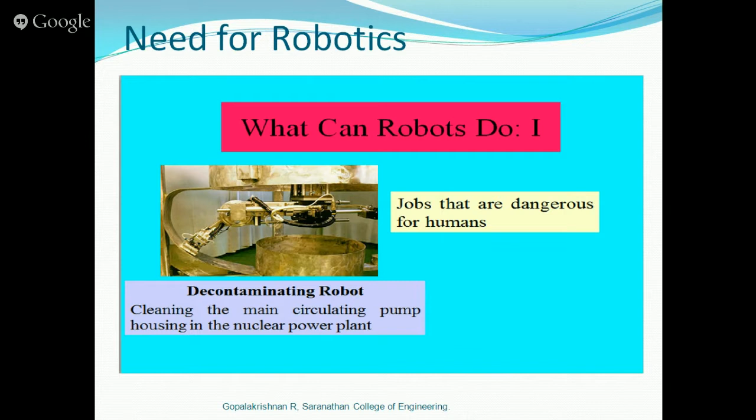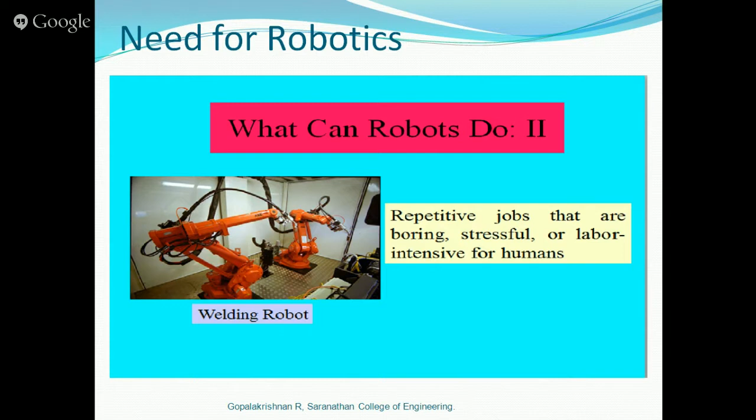Thirdly, in this technology and development situation, we are going in for use of robots in several areas. Like in metros, robots are used in cleaning of underground drainages, tunnels, etc., where it will be very difficult for incorporating humans in those type of actions.

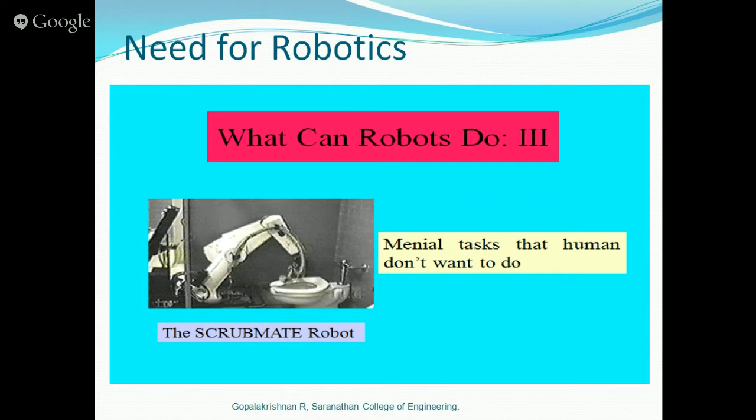Coming to the applications of robotics, there are several areas and there is not going to be a single area where robots cannot be used. Like in general purpose robots, we have industrial type of robots, educational robots, military robots, healthcare, research robots, and entertainment robots. Coming to the example of industrial robots, we are using robots for welding, spraying, painting, pick and place.

Coming into educational robots, we are using computers. Computer is a type of robot, and we have projectors. These are robots which actually reduce human effort.

Military robots. In military areas, we are going in for use of robots for actions which may endanger humans, like surveillance, etc. In healthcare, we are using robots for diagnosis, CT scans, endoscopy, etc. These are robots which will actually come in handy for those type of operations.

And we also do have entertainment robots. In these days, we have created a humanoid robot which actually plays a song, which will be able to give us certain application, which will be able to give us a situation where we feel homely.

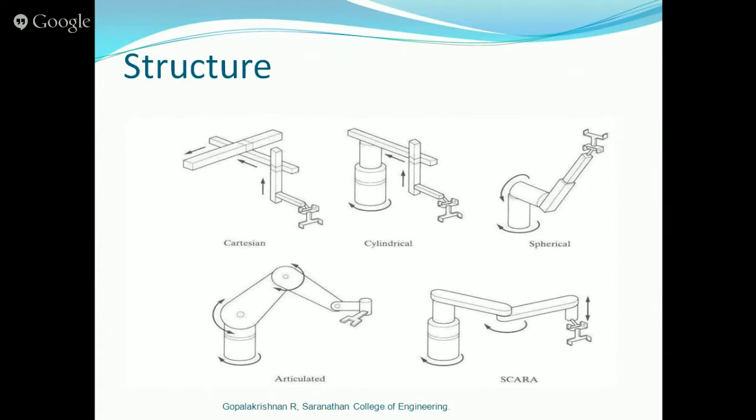Actuators and manipulators play a vital role in control and motion of a robot. As we say in a human arm, manipulator is a human arm. Actually, actuator imitates the actions of nerves and bones. So a manipulator is a whole arm which controls the action of any given system, whereas the actuator plays the role of incorporating the actions of manipulators.

There are different types of actuators which we use in these areas like pneumatic, hydraulic, mechanical, and electrical. In pneumatic type of actuators, we use an air control mechanism, whereas in hydraulic, we use a liquid control mechanism. In mechanical, a piston will be actually doing the role of controlling the motion of any manipulators. And in electrical, we do have several different types of motors, DC motors.

Specifically, we are going in for DC motor because we'll be able to control the path with DC rather than going in for AC. In DC, we will be able to get a precise action and precise movement, whereas in AC, we won't have any controllers. So in DC, it will be easy for us to go in for control.

Drivers, since we use DC motors specifically for robots, we are going in for drivers. Drivers are generally used to switch over AC to DC mechanism. There are different types of drivers we use for these types of robots, as electronic switches play a main part in these types of drivers.

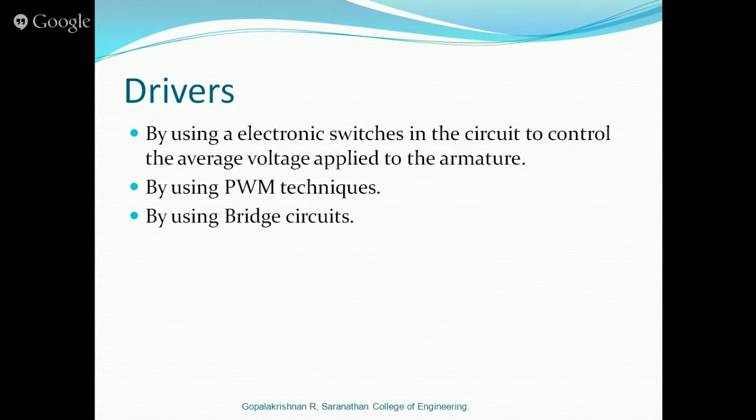Coming into control systems of robotics, there are two different types of control system: non-servo system and servo system. A non-servo system is a system where when we give an input to any system, the output will come without any change or interference, where errors won't be corrected.

Whereas in a servo system, we'll be having a feedback where the mechanism will be able to rectify the errors in the system. From the feedback, we'll give it into an input system where we have controllers, different types of controllers which control the errors. Controllers consist of components like integrators and differentiators. With integrators, we call it a PI system, proportional integrators. With differentiators, we call it a PD system, proportional differentiators. These types of systems give us error correction and a mechanism.

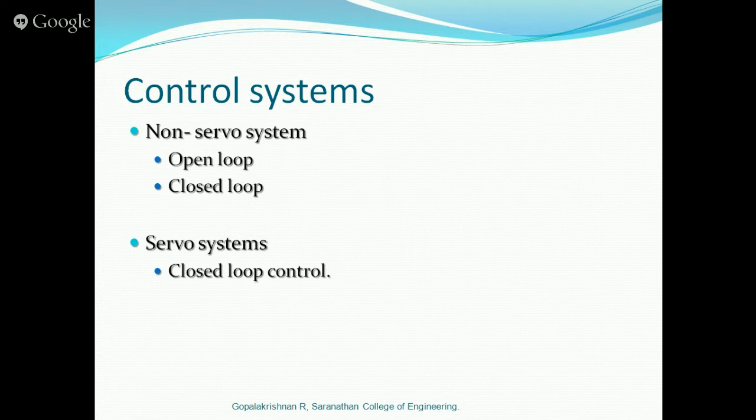Sensors play a main role in any intelligent type of robot. There are two different types of sensors: contact sensors and non-contact sensors. A contact sensor actually comes in contact with any object near the robot, whereas non-contact sensors, called non-tactile sensors, do not come into contact with any object or interference with the robot. We choose sensors basically based on the characteristics and application of our robotic purpose, like cost, size, weight, type of output, interfacing, etc.

Coming into non-tactile sensors, there are different types like proximity and range sensors used for the purpose. Proximity sensors are used for low-level distance applications, whereas range sensors are used for larger distance applications. There are different types of proximity sensors like inductive sensors, Hall effect sensors, capacitive sensors, ultrasonic sensors, optical sensors, and eddy current sensors, which are used for this purpose.

In range sensors, we have a light sensor which is based on light, and an ultrasonic sensor which is based on sound. In inductive type sensors, we use it precisely for metal type objects to be understood by a robot.

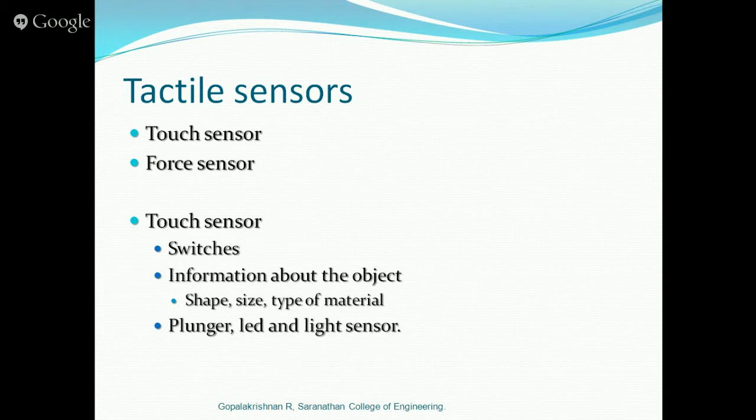Coming into machine vision: in the past, human eyes did what no machine could do - locating and positioning work, tracking the flow of parts, and inspecting output quality and consistency. Today, the requirements of many manufacturing processes have surpassed the limit of human eyesight. Machine vision provides the manufacturing equipment with the gift of sight.

Whereas the human eye is limited to what a human being could observe, machine vision gives us an absolute tolerance - we are able to observe and analyze parts of any area that could be analyzed.

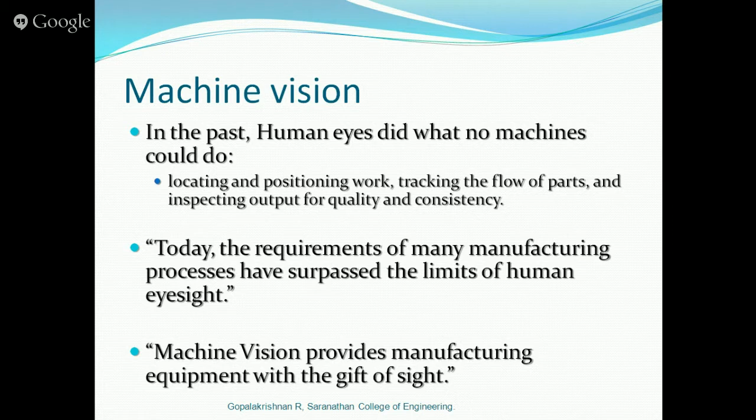Difference between human versus robot: robot advantages are strength, accuracy, speed. It does not tire, it can be used for repetitive tasks, and it can also measure and give us absolute measurement. Whereas human advantages are intelligence, flexibility, adaptability, skills, and the ability to learn and estimate.

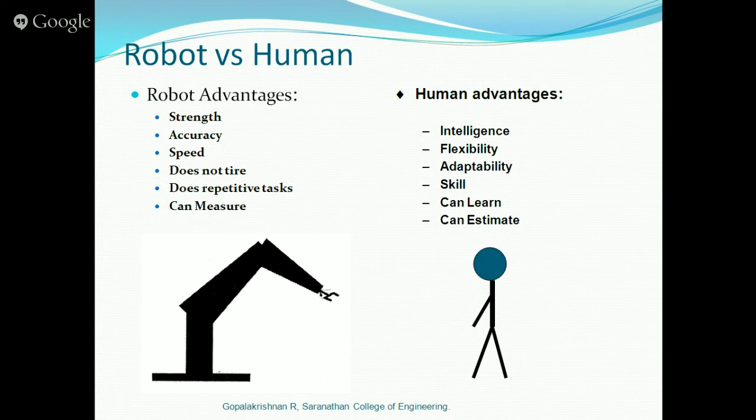Coming to robotic vision - robotic vision may be used for the process of extracting, characterizing, and interpreting information from a three-dimensional world, what we call 3D imaging. We will also be able to analyze the image, what type of image it is, coming to any industrial oriented application.

A robot in an industry will be able to acquire an image from the given task, analyze the product, give us the estimated error, and also correct the error.

What are the fundamental tasks involved in robotic vision? First is image transformation - transformation of an analog image to a digital field. We also use grayscaling in these types of image transformation.

Coming to the analyzing part, the robot will be able to analyze whether the image is in a proper condition or the particular object is in a proper formation, and it also understands the product which is to be analyzed.

Generally, in any robotic vision, we have object verification, tracking, fast extraction of stable image features, object model acquisition, efficient indexing of a model database. These are the primary tasks which will be incorporated in any type of robot in a vision system.

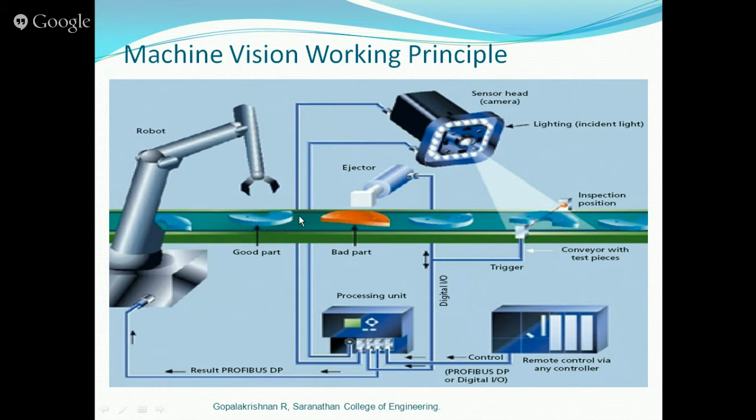We have different types of end effectors like grippers, holders, sprayers, cutters, welders. The end effector is the part which makes the whole system run, performing the process of ejecting or continuing the process. Here, the object is taken into the medium, and the effector picks or rejects the actual part of the system.

These are the components which are used in a machine: lighting, camera, part sensors, imaging, processing, inspection software, communication, and networks. Lighting is used for clear understanding of the object in a processing unit. A camera is used to observe the analog signal, and a part sensor is also used to observe the object.

Imaging is used to convert the analog signal acquired by a camera and sensor into a digital image. A processing unit handles the analyzing and processing, and the inspection software inspects the object from the processing station and rejects or allows the process to be done. A communication network holds the communication between all the systems in a processing station.

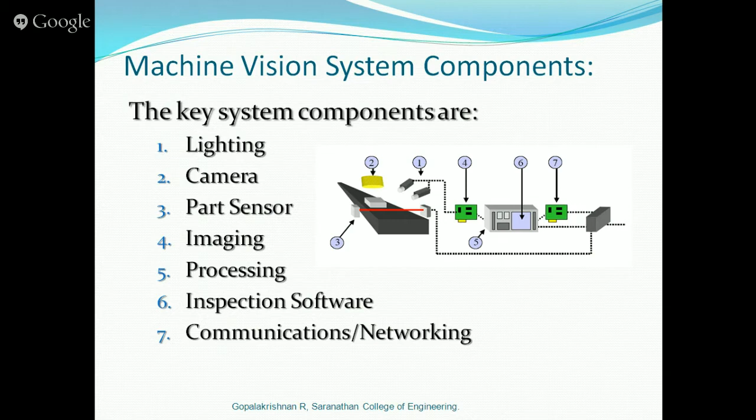Programming plays a vital role in any robotic medium. Programming is a task which is created inside any robot. There are two types of programming: online programming and offline programming.

In these days we are mostly using offline programming, whereas online programming has two different types: teach pendant method and lead through programming. Teach pendant method is where we record the accurate traverse condition of robot motion into a handheld device, so a user will be able to traverse the robot in a particular motion, restricted to a single kind of action only.

Whereas in lead through programming, we use a continuous motion of the same part which we do in teach pendant method. In lead through programming, we create a recording sequence of any robotic function, and when the recording sequence is created, the robot will be able to lead through that recorded, sequenced programming.

Coming to offline programming, there are different types of offline programming which can be incorporated into a microcontroller of a robot. The microcontroller is the main part of a robot which makes the whole system work, and it has to be specialized with types of languages understandable to the microcontroller. There are different types of languages like AML, VAL, AL, RAIL, Robotics Studio, Code Composer, Keil, etc.

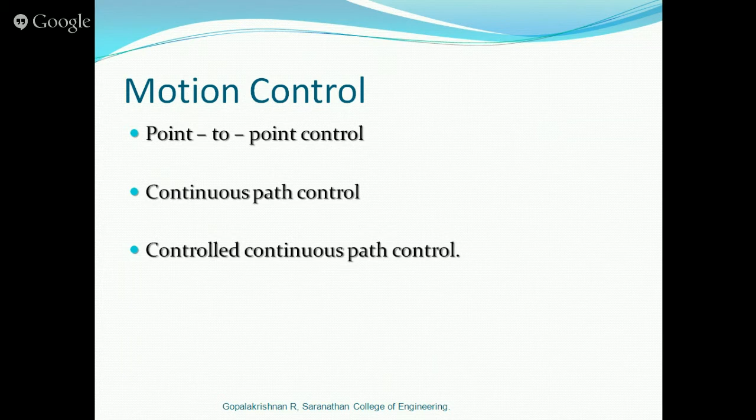Laws of robotics and intelligent systems. In higher types of intelligent systems, there are three different laws which are being used. These laws have been invented by Asimov, the author and creator.

Law one: a robot may not injure a human being or, through inaction, allow a human being to come to harm.

Second law: a robot must obey orders given to it by a human being, except where such orders would conflict with the higher order law, that is the first law. So a robot must obey the order given by a human being, and also it should not conflict with the first law, that it should not harm the human being.

Third law: a robot must protect its own existence as long as its protection does not conflict with the first and second law. As it says, a robot must protect its own existence as well as it should not injure a human being or it should also obey a human order.

These laws have been incorporated in humanoid robots and robots which are used in industries, so that they do not come in conflict with human actions.

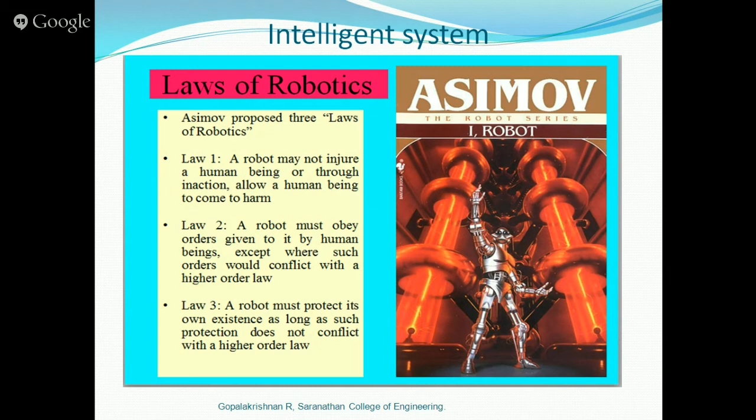Building a robot. What are the necessary conditions to be taken while considering building a robot? We are going in for three different primary tasks. What are the primary things to be considered? While going in for creating a robot, we have to consider exactly what our application is, according to the robot's own application. There are different types of application, as said earlier.

Application may be a pick and place condition or welding condition. A robot can be used for loading, unloading purposes. There can be an indefinite type of application. For this type of application, we are going in for considering a primary task. After considering the primary task, what is the type of structure we are going in for?

Structure like Cartesian coordinates, cylindrical coordinates, or spherical coordinates, or articulated type of robots. And once we have considered the primary task, we have to go in for considering the components.

We have to consider components like sensors, motors, platforms, and what type of programming we are going to use, whether offline programming or online programming, etc. As we consider the component, it should be chosen according to the primary task which is being considered, like the application. We need not go in for a larger range of components for a smaller purpose, and also we should not go vice versa, a smaller range of components for a larger purpose.